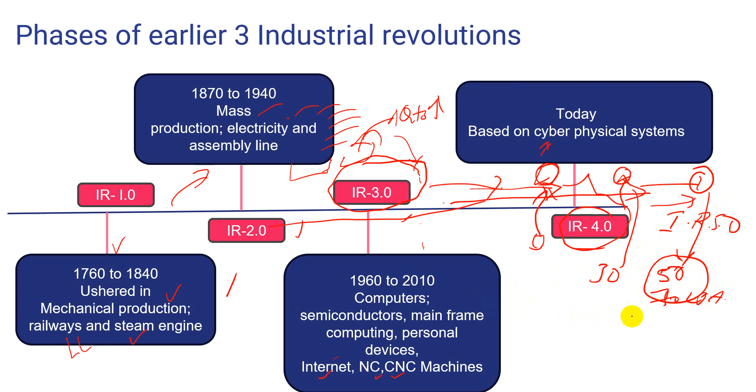My suggestion to young engineers is that most students at this level get knowledge from the syllabus, but they still have to improve and learn these kinds of industry 4.0 technologies, as I showed in the previous slide, so that they are ready to work in this field. That's why packages here are 30 lakh, and if you are really good in further advanced technology, the packages may go to 50 or sometimes 70 lakh per annum. Most companies are ready to invest this much in students ready to work in industry 5.0 technologies.

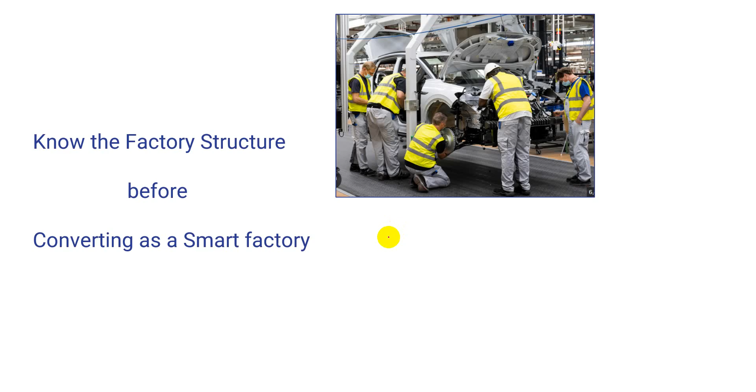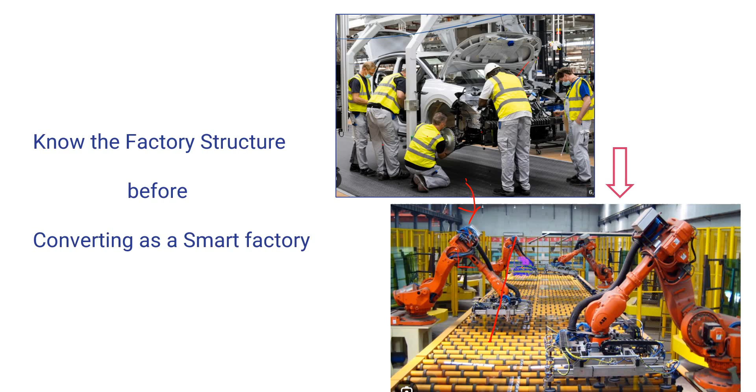Before going deep into industry 4.0 or smart manufacturing technologies, we should first understand how the factory structure will be, then how it is going to convert into a smart factory. We can see that people used to assemble machines and automobiles manually, in each and every part. In the current scenario, robots are ready to replace and assemble everything in a single assembly line, using robots, and this is industry 4.0 technologies.

Smart manufacturing, briefly, is a process that optimizes manufacturing procedures through automation, big data analytics, and computerized controls that minimize cost and maximize productivity.

What are the benefits of smart manufacturing? Smart manufacturing enables continuous operation improvement, increasing productivity and decreasing costs. Self-monitoring and predictive maintenance is enabled by machine learning, reducing downtime and repair costs. Another advantage is real-time awareness of the state of production, equipment, and raw materials, making it easier to meet changing customer needs.

So we'll spend some time here. We'll discuss more on the benefits, how this is helping in current industry 4.0 technology in industry, especially how it is going to help in any pandemic situations.

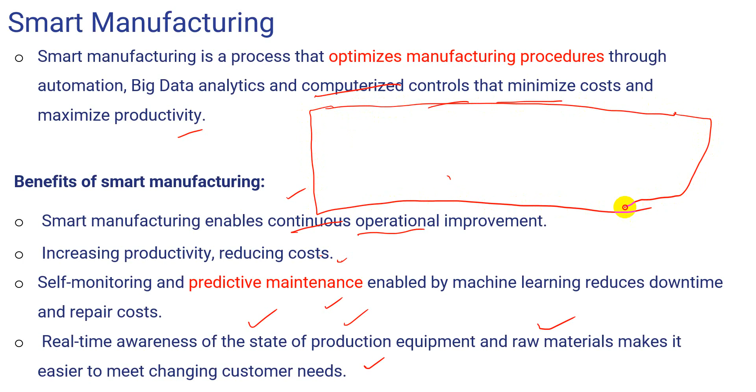Assume there is a factory in New Delhi, and there is a manager sitting maybe in Chennai. He traveled somewhere and got an announcement that a pandemic is going to start from tomorrow. He almost reached Chennai, but his intervention is required in the industry, so he has to verify physical changes in the systems and give commands from his system or laptop. But sometimes he has to verify something which he cannot do only by video calls and so on.

During that stage, industry 4.0 technologies like digital twin come in, where the clone of the exact physical system can be made in his laptop or high configuration system. Whatever physical system is there, he can have it in this laptop, and whatever changes are happening, he can sense it, not by touching physically, but through the data which is coming from the sensor.

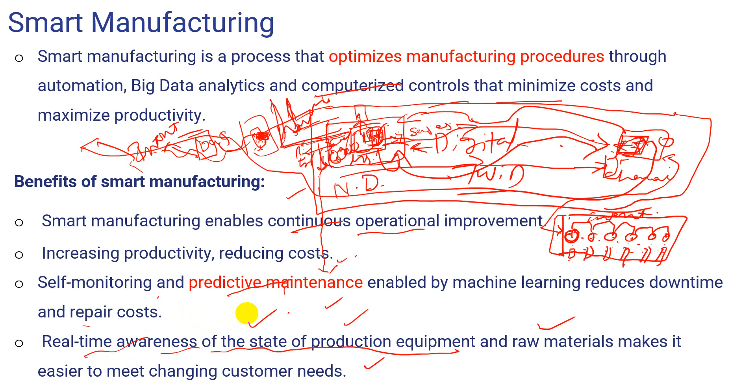So the sensors are helping maintenance engineering with condition monitoring techniques, so that he can sit somewhere and understand the abnormality, and immediately stop if any issues are going on. So that's how he or she can see the real-time systems, and get aware without stopping production.

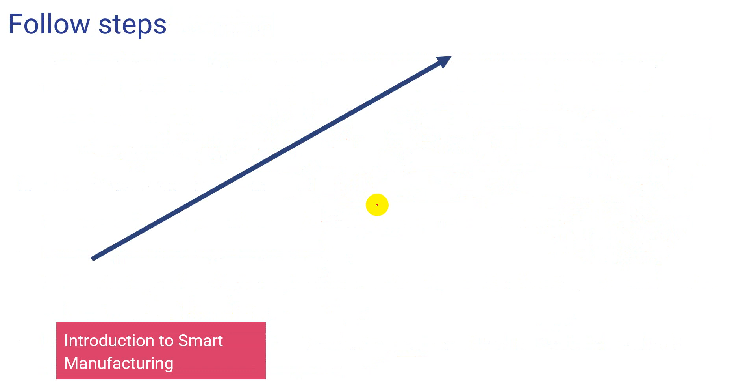So you can see the following steps: introduction to smart manufacturing. Any student can learn this, and the hierarchy I'm explaining shows how we can imbibe these technologies.

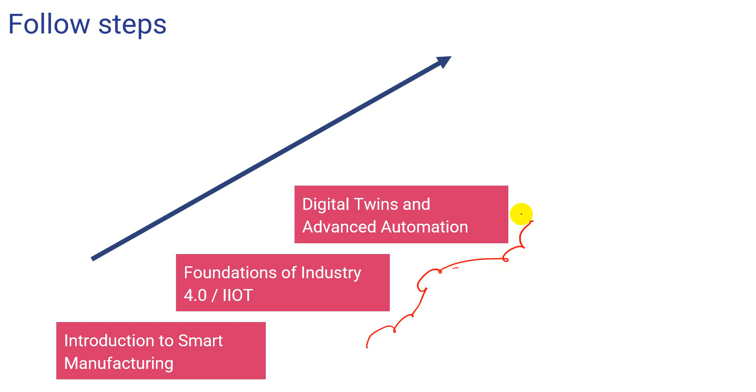Then foundations of Industry 4.0 by integrating IIoT technologies like cyber physical systems. Then you can go for digital twins and advanced automation, where we can do replication of physical systems into virtual systems, then integrate that system with AI.

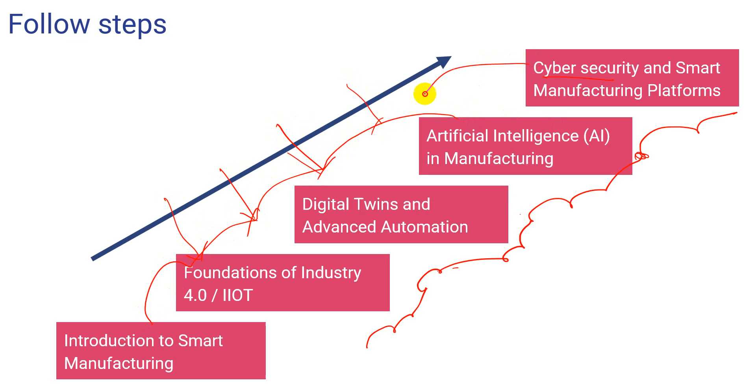Machine learning and AI algorithms are required for prediction of failures, we can do that from here. Finally, we can integrate those technologies into any manufacturing factory, so cyber security is required, because most companies are now connecting to one another through the internet. So it may be attacked by cyber attacks on those physical systems. Cyber security is very very important in the current field.

Then what is Industry 4.0? Industry 4.0, which is synonymous with smart manufacturing, is the realization of digital transformation in the field, delivering real-time decision making, enhanced productivity and flexibility, and agility to revolutionize the way companies manufacture, improve, and distribute products.

So Industry 4.0 has given rise to an emerging sector in manufacturing, which we call smart manufacturing, and that opens doors for analytics in the industry. It is a technology-driven approach that utilizes IoT and internet-connected devices to produce goods and monitor processes.

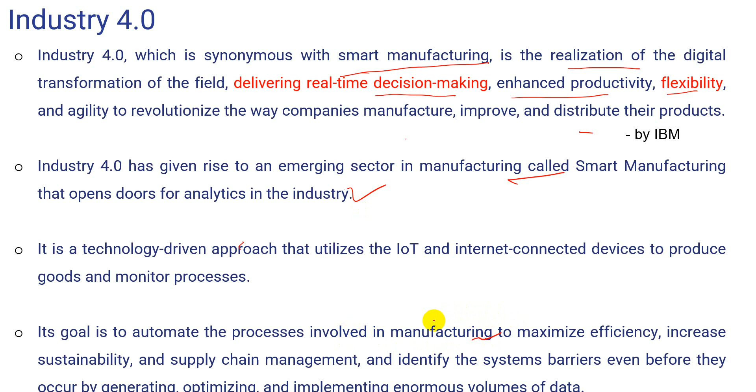The goal is to automate the processes involved in manufacturing to maximize efficiency and increase sustainability and supply chain management. It also identifies system barriers even before they occur, by generating, optimizing, and implementing enormous volumes of data. So these are the core technologies in Industry 4.0 which help develop a normal factory into Industry 4.0 technologies.

So the pillars like big data analytics, autonomous robots, simulation, horizontal and vertical system integration, IoT, cyber security, and cloud, additive manufacturing, augmented reality.

So generally, if you see the system as explained in the previous slide, we require sensors to get the sense of that particular issue and get the information to the particular engineer, manager, or operator. So the data is coming day to day, and it is huge, terabytes.

So we call that the big data. How to manage that big data and analyze it into a small form like dashboards, that is very important.

And autonomous robots, you can see, sometimes physical intervention is not required. During that time the autonomous robots will help, which we now call cobots. The cobots will go to those particular places where a human cannot enter, especially in steel wire extruding manufacturing, having more than 1000 degrees centigrade, where a human cannot enter.

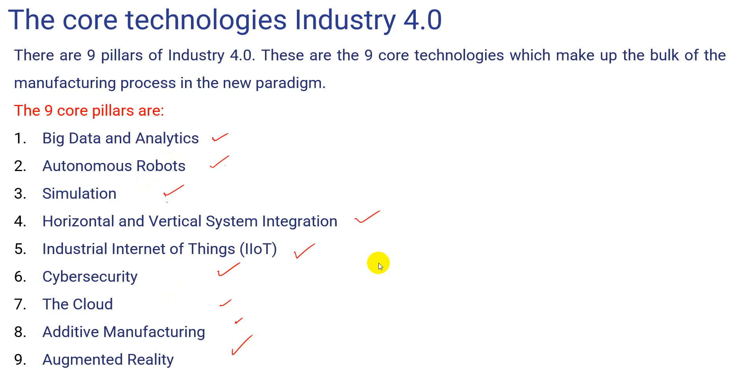Then what are the impacts of Industry 4.0 on the manufacturing process? It involves the digitalization of the manufacturing process by collecting and analyzing data from every stage of the production process to optimize the manufacturing process, reduce waste, and improve quality.

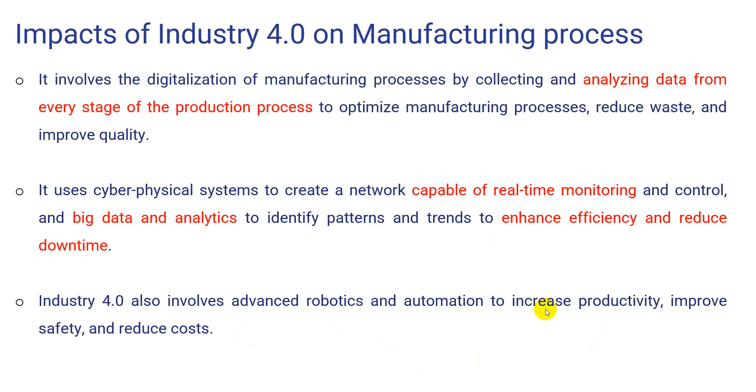It uses cyber physical systems to create a network capable of real-time monitoring and control through big data analytics. It also identifies patterns and trends to enhance efficiency and reduce downtime. Industry 4.0 also involves advanced robotics and automation to increase productivity, improve safety, and reduce cost.

When Industry 4.0 and automation come into the picture, these are some roles enhancing efficiency across various sectors. We can increase productivity, reduce cost, and consistently verify quality, and maintain consistency.

We can speed up the process, improve time efficiency, and do data integration and data management, because all the authentic data is coming from the sensors. We can verify and analyze it. Safety and risk management can also be improved by taking proper measures through cyber security integration.

Scalability can be improved by increasing the production plants or quantity. For example, if a company currently has only two plants, more management employees are needed to verify continuously in two places, and physical intervention is required to manage two factories.

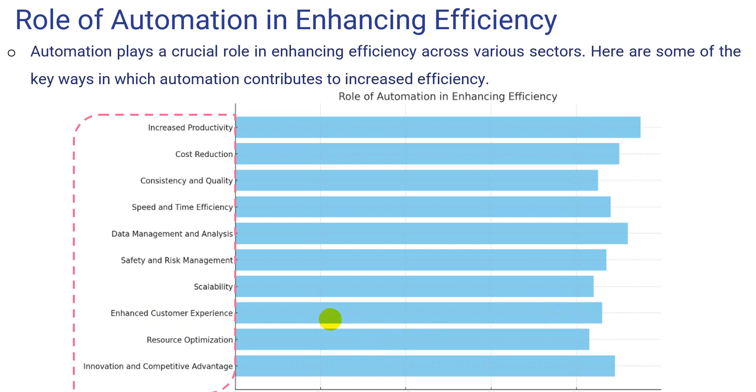Resource optimization can also be done, along with innovation, competitiveness, and advantage.

One case study we've seen in recent days is Amazon robotics in warehousing, implemented for e-commerce. The challenges they faced were managing massive inventory and ensuring timely order fulfillment in a high demand e-commerce environment. So they started to understand how to resolve these issues.

They started to adopt Kiva robots - Kiva being a manufacturing company of particular robots. They implemented Kiva robots in fulfillment centers to automate the picking and packing process. The robots bring shelves of products to human workers, who then pick the items for packing.

From this, the company improved efficiency by 300 percent, with gains like reduced time taken to locate, pick and place items, and minimized downtime. The cost savings included significant reduction in labor cost and improved space utilization of the warehouse.

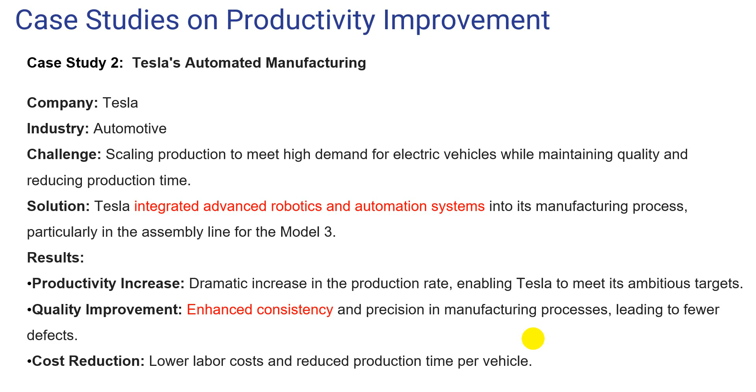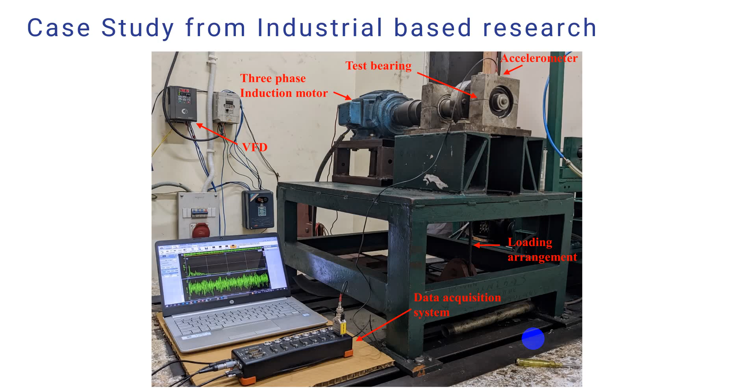Another company, Tesla, has used this, and even some researchers have started to adopt IoT technologies so they can sit and understand what is happening. They can do research on abnormalities of some parts, analyze them, and publish papers. Even FMCG companies like McDonald's have used mobile robots for the food industry.

The challenge was improving order accuracy and speed in a fast paced environment. They used self-service kiosks and mobile ordering systems in restaurants, where a robot kiosk collects a package of a particular food item and goes to the delivery place to deliver the package on time.

The results observed from this were increased productivity with faster order processing and reduced wait times for customers, huge improvement in accuracy, and enhanced customer satisfaction through efficient and personalized services. These are some success stories through smart manufacturing process.

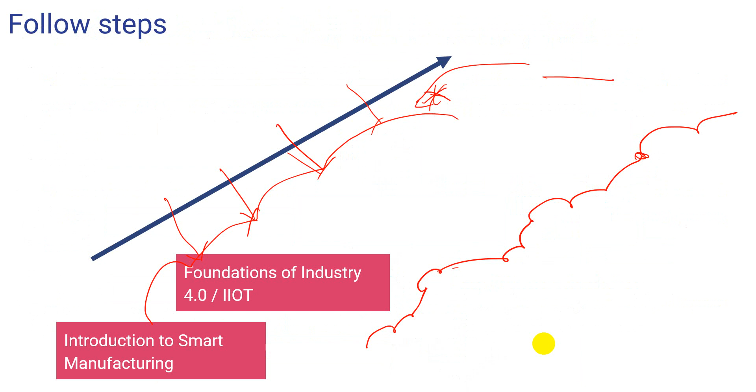Through these, we can understand the current requirements for roles, if any graduate learns these technologies, how they can benefit from them. The person can easily get more than 20 or 40 LPA per annum. With this, I'm concluding, and all the best for your careers.